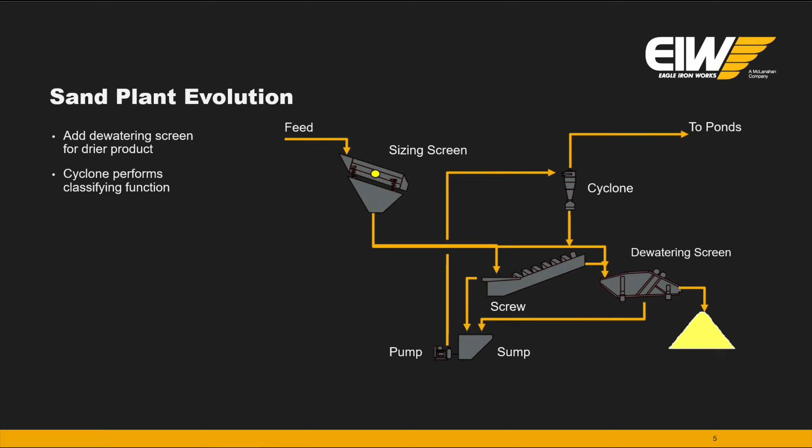Getting onto a conveyor belt, there was still some loose water on there. That could cause housekeeping issues. By adding a dewatering screen, it removed all of the freestanding water and produced a drip-free product. Conveyor belts were able to handle that better. The stockpiles would be drier at that point. Material was essentially ready to go, shipped out that day if need be. We had a faster turnaround for the overall product.

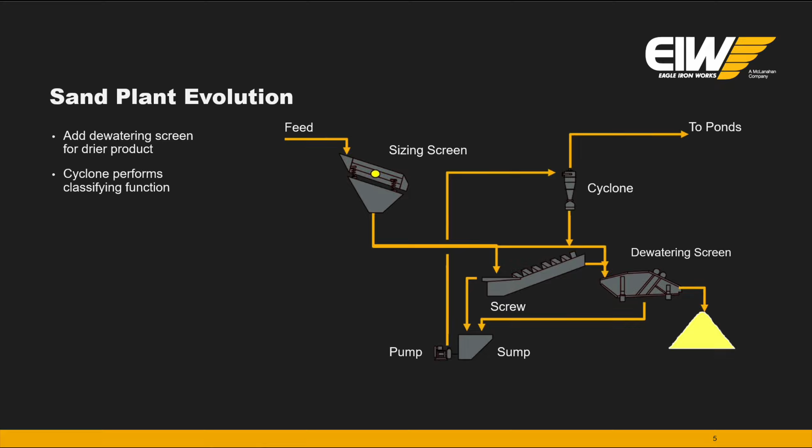So when demands for the sand became higher and higher, needing a drier and drier stockpile, that's why the dewatering screens were introduced. And at the same time, the cyclones were still doing the majority of the final classification. So at that point, there was a question whether the screw should be in the process, and it was removed. And the change in that entire process, when you remove the screw, that was doing a bulk load relief for the cyclone. So the pump, the sump, and the cyclone had to get bigger because there wasn't that load relief from the screw. Everything else was still staying the same.

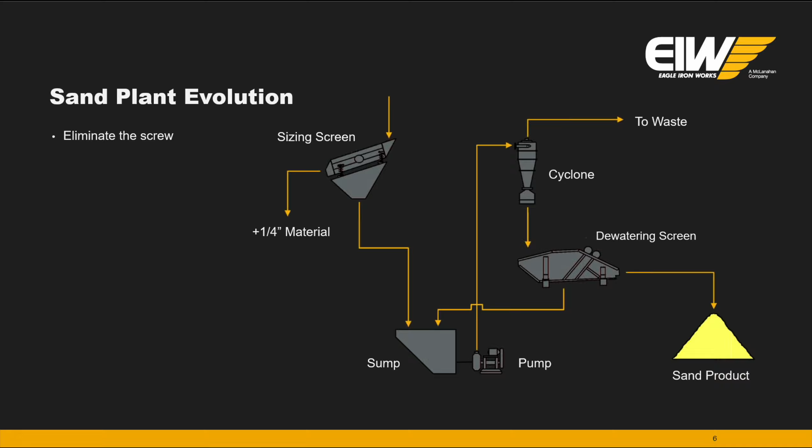The cyclone overflow was still the waste. So the cyclone was doing all of the process. The dewatering screen's doing all of the dewatering. The sizing screen up front really hadn't changed too much. So that's where we moved into the modern sand plant. That's when we say modern sand plants for the washing, classifying and dewatering of sand, drip-free consistency.

And when I say drip-free consistency, just imagine taking a handful of sand, making a ball, kind of like a snowball, and pressing it together and trying to squeeze the water out. No water would come out. That's the drip-free aspect of it. So these kind of plants are modular in design. They're easy to set up, small footprint, and there's a level of configurability to them for the different applications that you want to do. So a little more flexibility. It does take a little bit of planning.

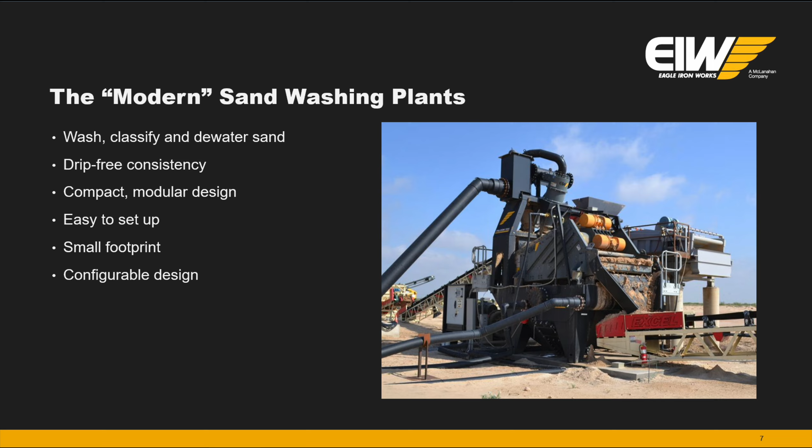Just to take a look at it, the next slide that we're going to be looking at is one of the case studies that we've done. Okay, so this is a project that we did in Kermit, Texas with our dealer Excel Machinery. Their goal with this project was making 140 mesh frac sand. So they needed something that was easy to set up; they had a small window to make this thing produce material. So we wanted to find some equipment that could produce it efficiently and cost effectively at a good price point. And their whole goal was really just to get those ultrafines out of there so they could have a sellable product.

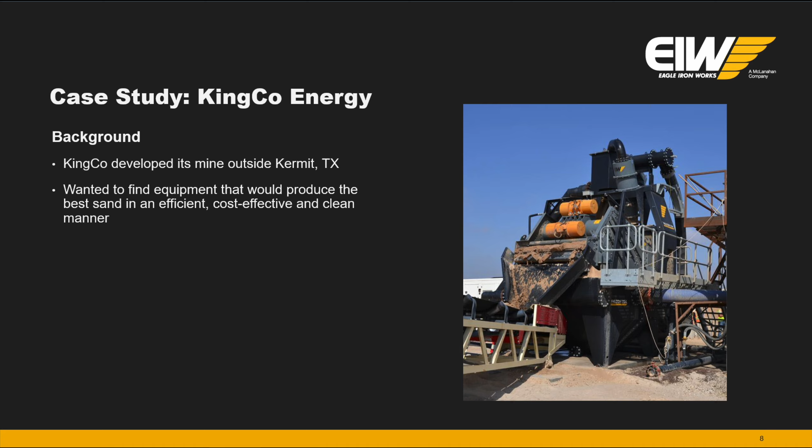So our dealer Excel came up with a Falcon 724 for this application. It would be good for the tonnage they were looking to do. We rate these plants anywhere between 300 and 350 tons an hour. In this application, they were more around 250 tons per hour in real-world production, making sure that they could make the classification and the cleanliness of the material needed in order to sell it. They really liked this one because of its ease of setup. They were able to put this plant up in about 2 days.

It is a modular type design. So we have a sump, a dewatering screen that sets on top of that, and a cyclone bank that goes on top of those two items. So very modular, very easy to put together. It comes with its own power panel, and everything on the plant is mirrored. So if you need to have your feed come into the left or right side of the sump, or if you need to move your catwalks to either side, that is all available as well. And they had this thing actually producing material in under 2 weeks.

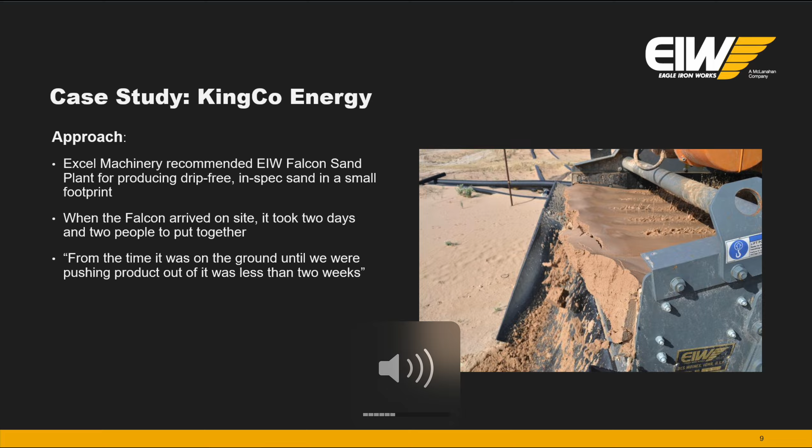Again, like Alan said, a big key here was the moisture content. So they were able to get to about 7 to 8% moisture off of that dewatering screen. And the footprint was much smaller than what they were used to, so that did help. At the end of the day, they were very happy. They had a nice dry product that was in spec, and they were able to load it out and sell it within the same day as it coming off of this plant.

So that plant was put out there in April of 2024. It's been running almost continuously since, and a very good case study for Eagle and our dealer Excel.

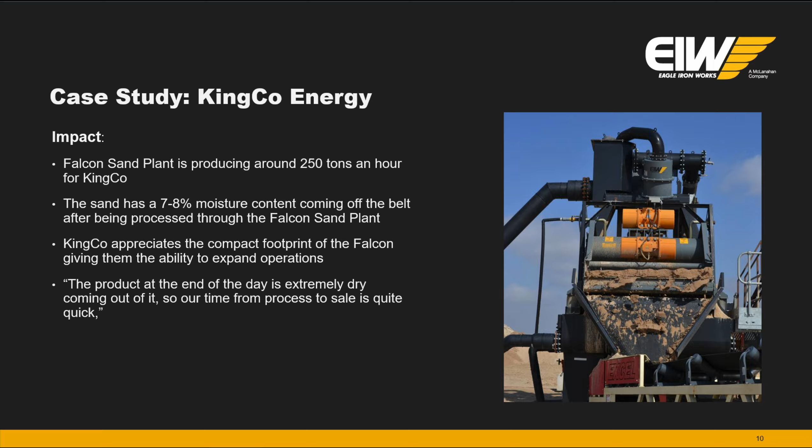So just to give a little more of a breakdown of what a plant looks like, Kurt gave an excellent verbal reference of it, but here's a picture of it. You have the catwalk. We talked about that as being configurable. That's the reversible. The access is very important to these type of plants because they're a little bit more elevated, a little bit harder to look at from the ground level. So you need to get up on that level, looking at the screen itself, looking at the underflow of the cyclone. That's what the walkway presents access to.

The control panel, then we have the slurry pump, which is, just think of it as a conveyor for slurry, and that's taking it up to the cyclones. Cyclones are doing its classification. The overflow is taken away, and the dewatering screen has that discharge of material.

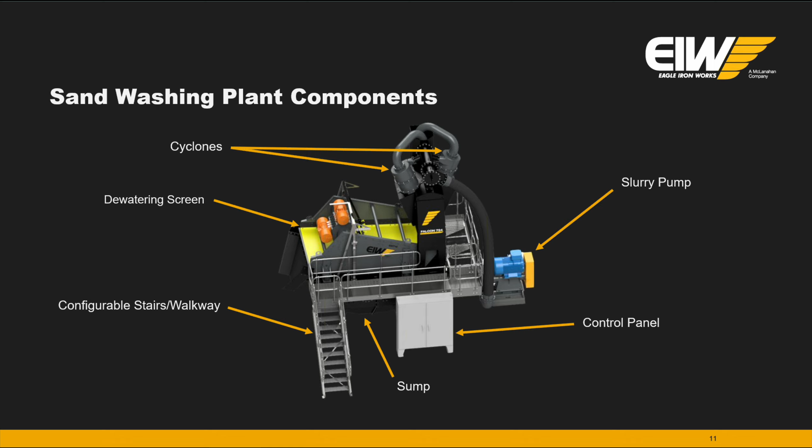So how a sand plant works, we've kind of talked about this a little bit. Most of these sand plants like this are sump receiving the slurry in the first place. The pump takes it up to the cyclones. Sand is classified there. The dewatering, like I said, is a drip-free, ready for conveying. Video here shows how it's discharging. So you see how that material just kind of crumbles off the end of that dewatering screen.

10% is a very normal range. There are a lot of applications where we have gotten down to the 7%. You're not going to really see much further beyond that off of the dewatering screen. Some material holds its water a little bit more, even though it's still drip-free. It can go all the way up to 20%, but it all depends on the material itself.

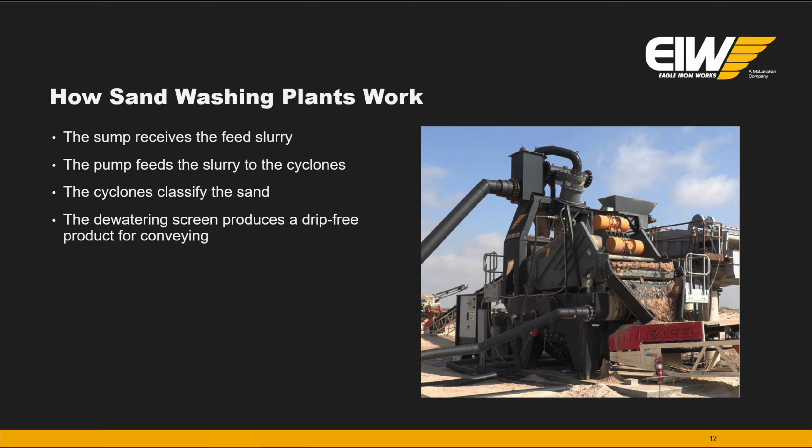So sizing up a sand plant, like a lot of plants, you're just looking at the tons per hour, your gallons per minute, the feed gradation. And we have it in here, multiple products and gradations. And that's because some of these plants are not just that straightforward. They utilize the dewatering screen for two products at the same time. So you'd have parallel sump, pump, cyclones, and then have both of those systems discharge on the same dewatering screen. It's a very common aspect of some of the more advanced ones. So you can have a coarser sand and then a finer sand and a blending capability on the discharge.

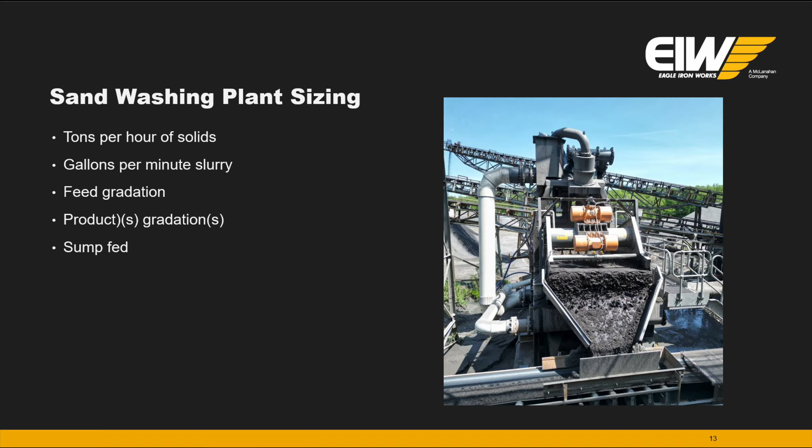So that's really on the sump fed type of approach. And like I said, most of those are sump fed. More custom designs can be screen fed, just changes a little bit. Still same equipment on there, but that's the approach of most sand plants.

So with the cyclone doing the majority of the heavy lifting of all the separation in here, I wanted to touch upon a little bit of the cyclone history. We talk about it as a modern piece of equipment, but in truth, it's quite old. It was first patented back in 1885. They started really fine-tuning it for liquid solid separation in 1891. For about 50 years, it just really wasn't understood. And in truth, in some industries, it's still not really accepted or understood by most people. Though at this time, if you dig down into the technical aspects of it, it's pretty well understood.

It's very predictable. But it was in 1939, a group called the Dutch State Mines took a chance and started utilizing hydrocyclone technology, mainly for coal and sand separation. The model that they made out of it really changed and set the standard for the rest of the industry. World War II ended, and we really needed, as a world, not just as a country, a boom in that type of material.

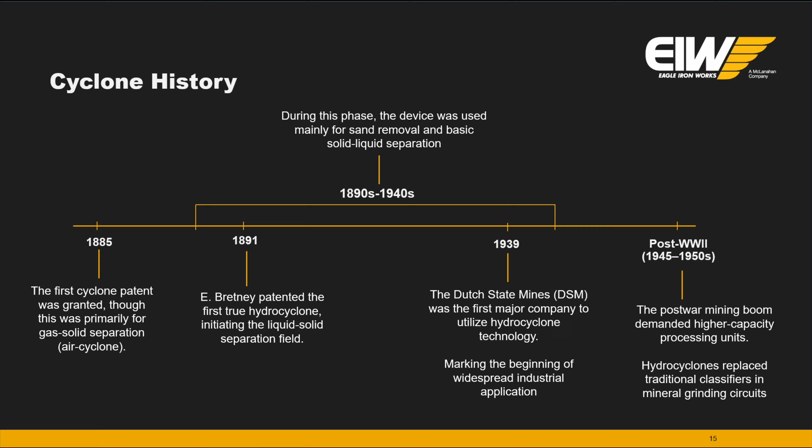So the cyclones themselves became more prominent because they provided an advantage over other pieces of equipment, the higher capacity aspects of it. In some industries, the cyclones have completely replaced the older technologies. And for the sand and aggregate type of approach, a lot of the classic equipment is still good, but the hydrocyclones have opened up the door for other areas.

So cyclone application, classifying between 38 microns, which is about 400 mesh, and 150 microns, which is about 80 mesh. Desliming the material, removing clays and ultrafines is a real good role for a cyclone. Those materials stay with the water. The water is removed into the overflow.

But at fines recovery, this is an area that the cyclones really have excelled at in a lot of comparisons to other pieces of equipment. And as for thickening for downstream equipment, it really is good for water scalping in a very tight area. So it has a lot of flexibility, a lot of uses within our industry.

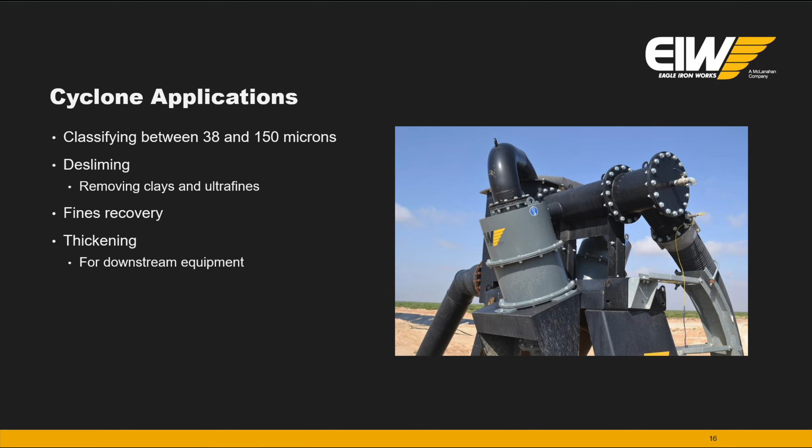So the advantage of the cyclone itself is it tends to be pretty inexpensive in comparison. Processes high volume, minimal floor space, head space, no moving parts within the cyclone. It really counts on the pump to do the majority of the heavy lifting to get this to actually perform.

It does have a better separation efficiency over free settling classifiers, and the capacity is independent of the amount of fines present in the feed itself, which is different from what fine material washers have. You will get them derated if you have an excessive amount of -50 mesh. So that's where the cyclone doesn't really have an impact on the gradation that's going into the unit. It still performs at the same rate. It doesn't get derated.

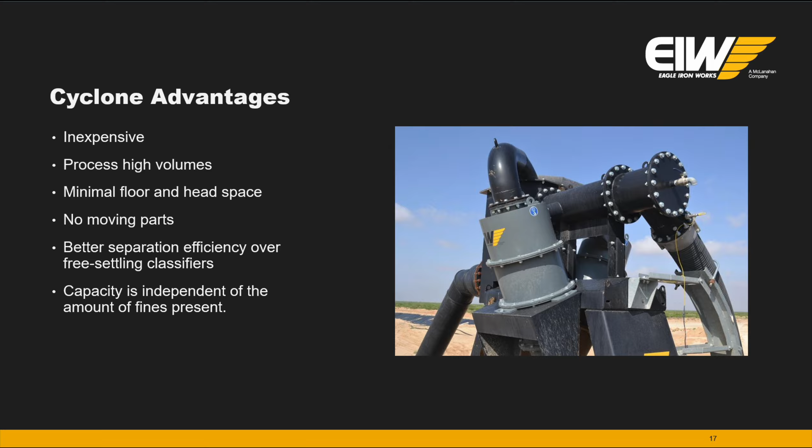Making up the cyclone itself, pretty simple. It's a feed box, feed inlet itself, a vortex finder that's for the overflow, an optional feed box extension, which is part of the configurability of the cyclone itself. The extension itself will cause the cyclone to capture finer material.

The cone sections, it's just shown as one here, but it can have multiple sections. This is another part of the process to get the cyclone itself to perform properly. And the spigot, some refer to it as the apex. This is the discharge, the underflow.

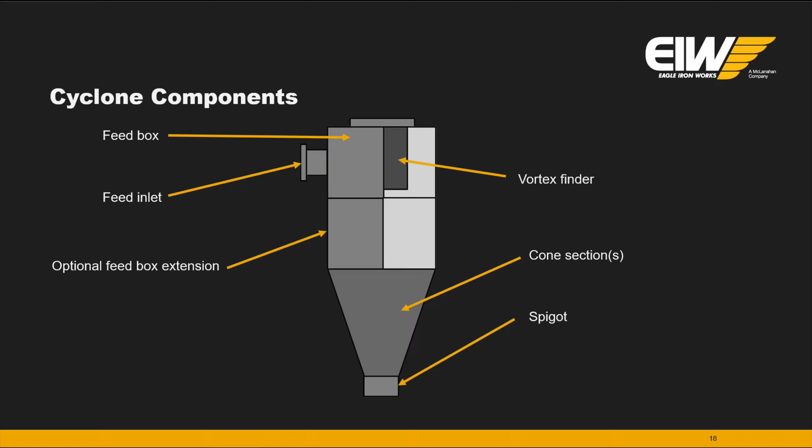So how a cyclone actually works, since we can't see inside of it, we have to do a lot of research and modeling, and that's where it's stuck for quite a while, why it didn't get done, because people just couldn't see inside of it. They really needed confidence in how this works. So over time, that's what's really happened.

So the centrifugal shaped device has one entrance and two exits. Essentially, it's a highly engineered pipe T. And in that, it has to have certain performance requirements in order for it to start doing that separation. So it's fed under centrifugal force, which causes the material to accelerate around the outside of the unit itself. That acceleration causes material to start its separation.

And also the swirling motion, kind of like a tornado, creates a vacuum in the middle, and that starts pulling air up through it. So you have two opposing flows within there. You have the slurry itself circling around, and then you have an air core being pulled up into the unit. What's happening in here is the coarse and heavy material is doing a motion downward, while the lighter, finer material is doing its motion upward.

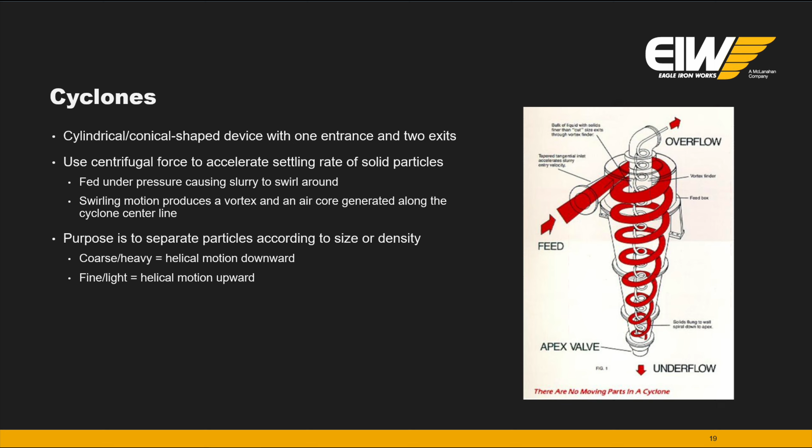Taking a little bit different look at that, same type of idea behind it, just explaining a little bit differently. The rotational spin causes the particles to spin on the outside. The heavier the particles, the more they get pushed to the outside. You recover the particles as they discharge out of the underflow.

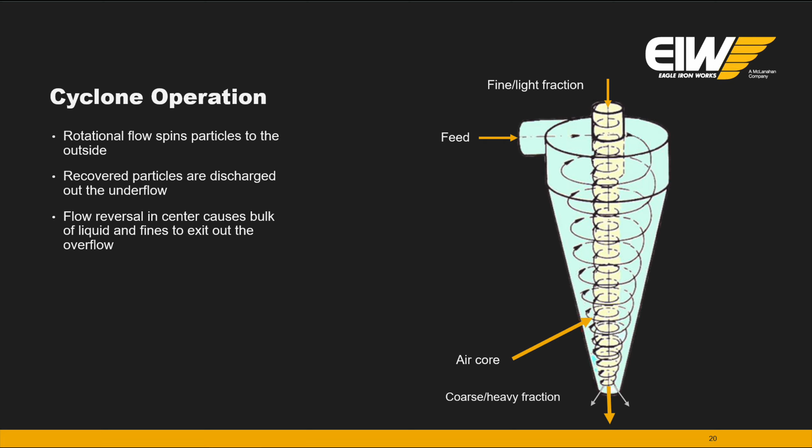The reverse of that causes a bulk of the liquid and some of the fines to go with the air core that's pulled up through the vortex finder. That's where the light fraction happens. So there's that swirling motion of both of them, the air core and the slurry itself.

And really, to get more into the physics side of it, what's happening in there is you have two different opposing forces pulling on a particle in different directions. The centrifugal forces caused by the pressure of going into this unit pull the material to the outside. The larger the particle, the heavier the particle, the more the centrifugal force has an impact on it.

So for that particle, if the centrifugal forces are greater than the drag forces, it's going to go into the underflow because it's going to be pinned to the outside. If the centrifugal forces are less than the drag forces, meaning the particle is smaller, lighter, and goes with the water, it has a higher probability of going into the overflow.

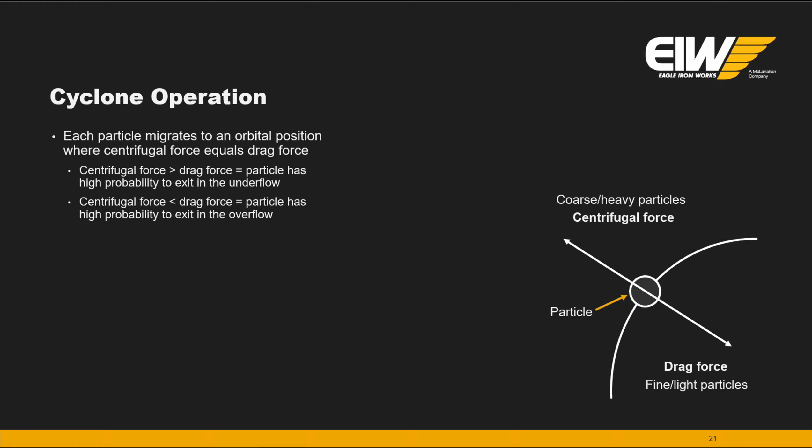So cyclone performance is really measured by measuring the pressure, because the pressure is a great way of telling us how much centrifugal force indirectly is being caused within the unit. So the higher the pressure, the higher the centrifugal force. The lower the pressure, the lower centrifugal force. So with a lower pressure, the centrifugal force has less of an impact on the particles, and the drag force will pull it more into the middle. Higher pressure, higher centrifugal forces, more pushing to the outside.

So when you're operating a cyclone, you want to look at what you're really trying to do. If you're trying to make a cut, if you remember, I said it goes from 38 microns to 150 microns. So if you're trying to make that cut at 38 microns, you're going to want a very high pressure, so 20 to 25 psi. If you're going to be wanting to make a coarser cut, that's where you're going to be going with the lower pressure down in the 8 and the 10 psi. So when you're doing your sand washing, you're generally doing that at the lower pressure. When you're doing your fines recovery, you're doing it at the higher pressure.

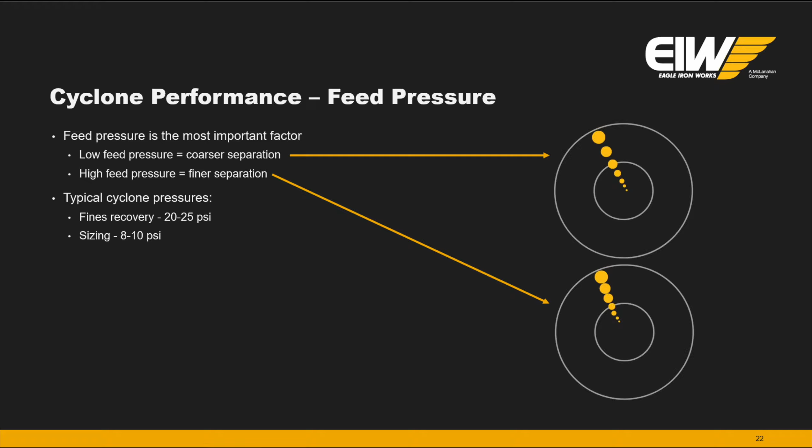Now, the vortex finder does play an impact on the cut size. So if you have the same flow going into the unit and you change your vortex finder and you go to a larger vortex finder, you're going to make a coarser cut. And if you think of it as just an opening for the material to go through, you've opened that up, allowing more material to be captured by the vortex finder. It also reduces the back pressure on the entire unit. So you'll see the inlet pressure go down. The smaller vortex finder with the same flow rate, you're going to get the finer separation because there's less room for that material to go out. So the vortex finder and the inlet pressure itself go hand in hand to help make the size cut that you're looking for.

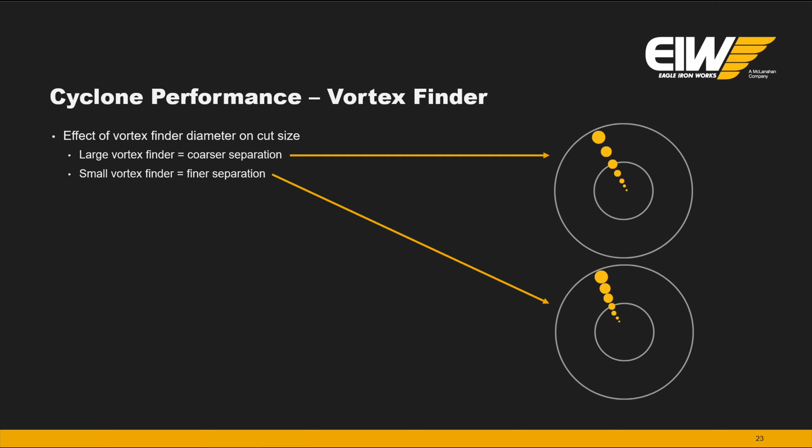On the underflow, this is really more driven by the percent solids in the entire slurry. So it's going to come out looking kind of like an umbrella. What you're seeing here is as the slurry comes out, it'll fan out. And you can see this flexing a little bit here and there. And that's a change in the tons per hour that's going through these units. The inside of that is hollow. That's where the air core is being pulled up in.

So as you have more material, that umbrella tightens up inward, the spread of it becomes less and less. As you have more water, it spreads out, fanning out more, and you'll see less of a curtain and more of water spray coming out of it. And as you increase the amount of water coming out of the bottom of the cyclone, that's where the fines will also come with. So in a way, it does have an effect on your cut size, but only for the amount of fine material that gets pulled into the underflow, which would normally end up in the overflow. In a very properly running cyclone, the best situation is to have as tight of an underflow cone as possible, and that's where you're going to get your highest efficiency.

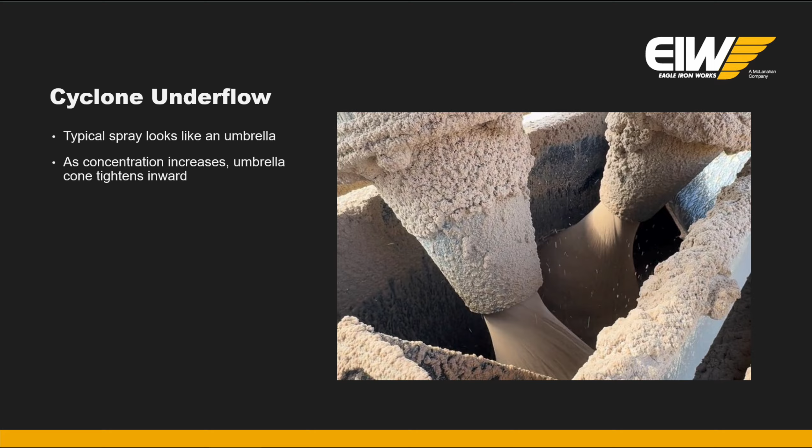Now, on the opposite side of that, if you get up into a position where you have too much solids, that's where you get into what's called roping. And it's called roping for a simple reason. It resembles an old rope as it's coming out, being swung at the bottom of the cyclone. So what's happening here is the feed density is too high for this configuration of the cyclone. So you have to reduce the feed density by decreasing the solids at the sump. And that may not necessarily be what you want to do, because you want to produce X amount of tons, and a decrease in the throughput into the plant is detrimental.

So fortunately, there's another path to go, and that means the spigot's too small, and you can replace it with a larger spigot or apex, depending on which terminology you prefer. They do have slightly different meanings, but they get interchanged quite a bit. So opening that up allows that air core to form up in there and begins that separation again. Without that type of air core, you really only have a pipe tee. That material just goes where it wants to go, and there is really no controlled separation efficiency at this point.

And also, I want to chime in on that portion. So with all of these plants, before they're sold, we have our applications and engineering group look at it to make sure that it's going to work for your application. We prefer that you send us your material gradations, the cut that you're looking to make. There are some adjustments that we can make as far as apex, vortex finder.

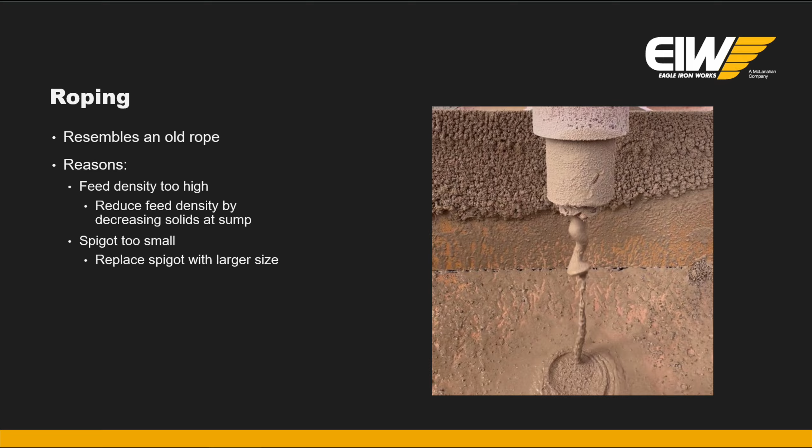At the same time, you have better control over the water itself. So there is a balancing act to that. Correct, and a better cut. Yeah. So as we'll get into, this is why you would pick a cyclone over a fine material washer. And this segues perfectly into this idea. The cyclone is closed to atmosphere, not necessarily an advantage, but it is closed to atmosphere. You don't get to see what's happening in there. You get to see the results.

We say it's very fast running, which just means it has a higher capacity. It just handles more material in a smaller area. It can increase the overall capacity of your plant. It's great at capturing fine particles. Because of the fluctuation around the apex itself, it does not like irregular feed. With the pressure being the driver of the centrifugal force, changing the flow within the cyclone changes its cut point and changes its performance.

So it does not like being irregularly fed with solids or fluids. It likes a solid, stable, consistent type of process. And once it has that, it will deliver a very solid, predictable performance. So they go hand in hand. They don't like being overfed. That kind of goes to the apex itself. It backs up and causes a separation issue. It does not handle being overfed very well.

Oversized particles also have an impact on it, meaning that if you get too large of particles in there, it can damage your liners. The material discharging from the cyclone itself is not conveyorable. It's too wet. It's down in the 60-70% solids. You try putting that on a conveyor belt, and you're just going to have a mess. So that's one disadvantage of it, pure and simple. Sometimes it's not truly a disadvantage if you're using this further on in the process and you don't want to dewater it that much.

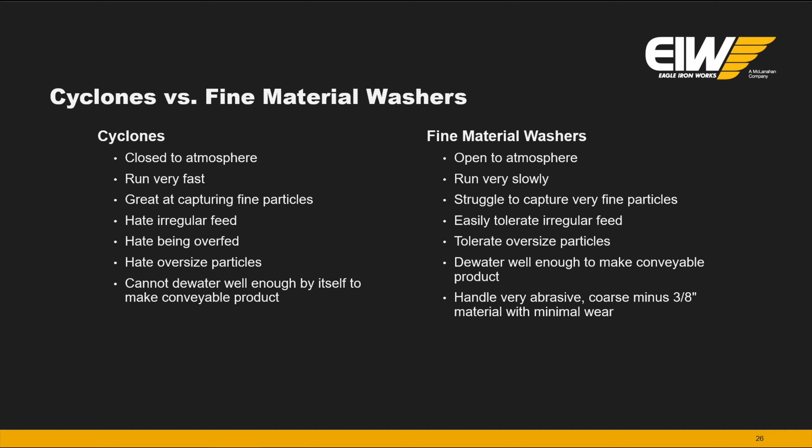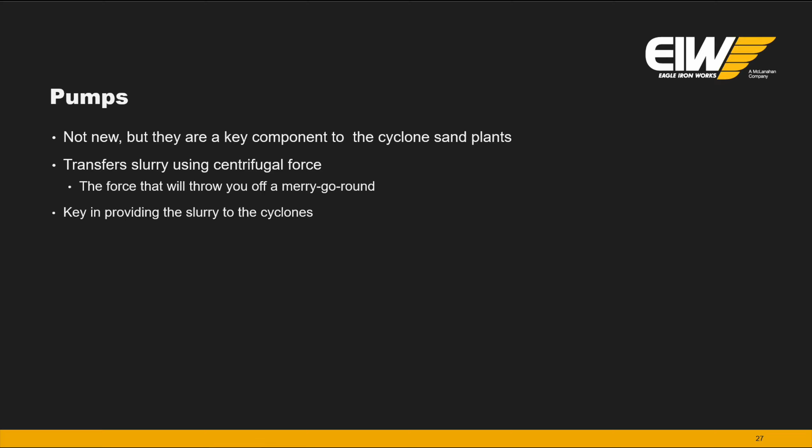So looking at a pump component itself, they're very simple, but once again, they're kind of closed, so you don't get to see inside of them what's going on. So you have your suction inlet, your vanes, which are part of your impeller, the liners themselves, the casings, and the discharge port. All of those are required in order for this to work.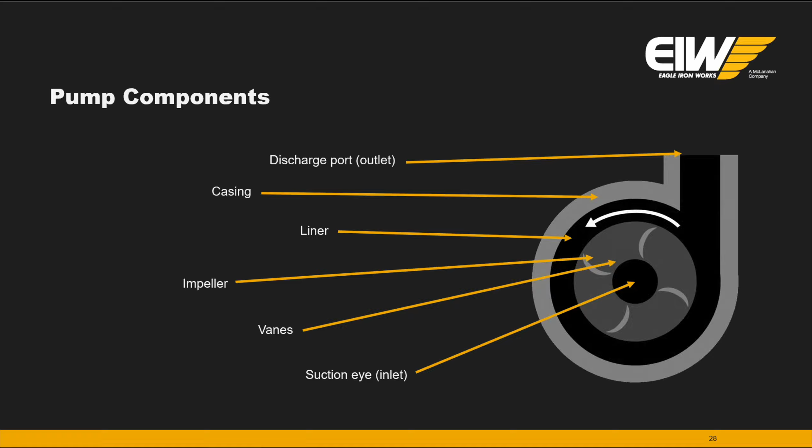So material flows into the suction eye. Calling it a suction eye is a little bit of a misnomer. It does not actually pull the material into the pump. It requires the sump and atmosphere to push slurry into the pump.

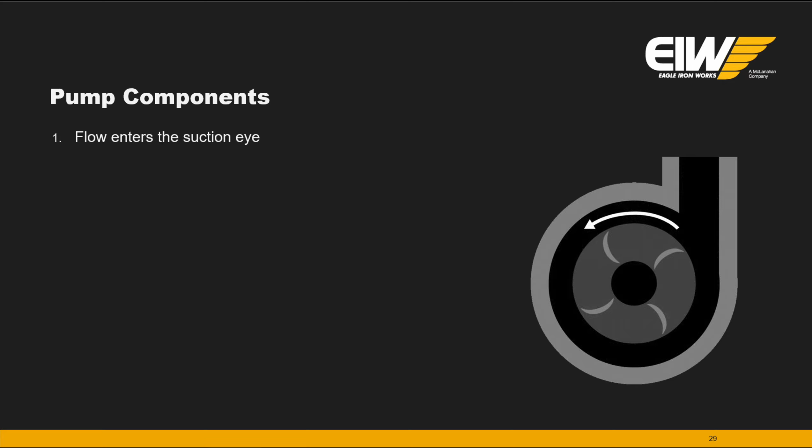Once that happens, the impeller will impart energy onto the slurry, and as it's spinning around, it's throwing the material outward, causing a pressure to build up inside of the casing. So using that centrifugal force to push that out, the material doesn't have anywhere to go against the casing itself, so it increases its pressure, and then it causes it to move out the discharge port at a pressure.

So as you put more energy into the pump, the further and further you can pump it against higher heads. So as we were talking about for the cyclones, as you move it from site to site, if you change the process and you change the flow, you also have to change the pump. And as you change the pump, that's going to affect the cyclone. So all these are interlocked.

So if you have an application where you're doing, let's say, 2,000 gallons, and now you want to do 2,500 gallons, you're going to have to change your pump. And then you're also probably going to have to adjust your cyclone to handle the higher flow rate. And they are configurable in that regard.

So anytime that you're moving any of these plants around or changing the process, it's a real good idea to pull in the original manufacturer and talk to them about it so they can help you set this situation up the best that you can, so you get the results that you want.

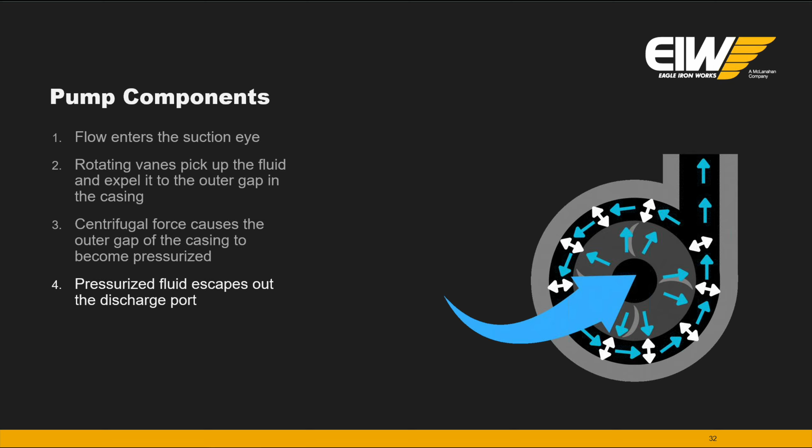Moving on to the dewatering screens, they're really the tail end of it. Once again, they're not normally doing any type of separation on there. They're producing a stackable, conveyable, usually ready-to-sell, drip-free sand product as it discharges off there. Short turnaround from a stockpile into a truck, as was mentioned earlier, as early as the very same day, but usually next day is what I see in the field when I've been out there.

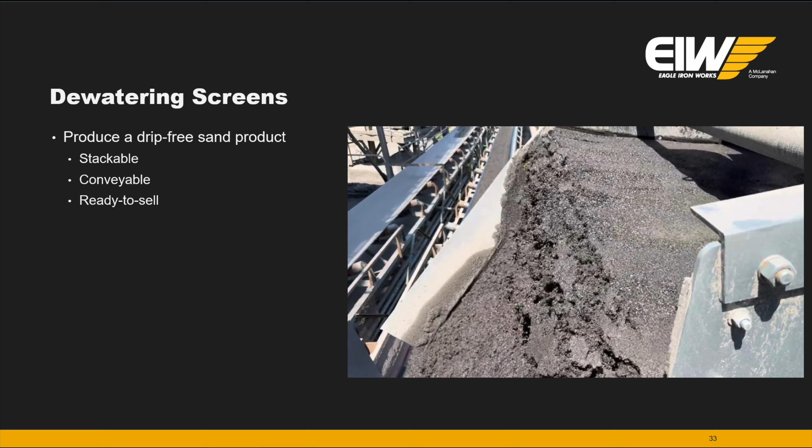So taking a look at the dewatering history, the dewatering screen is by far the newest piece of equipment in this entire process. It originated in South Africa, used for gold mining. They wanted to dry up material with a screen instead of sizing. It expanded a short time later into the coal industry. It was brought into North America around 1987, and it really started being pushed not just in the US, but around the world in the early 1990s. It gets you to a point where you're drying the material to a level that it's very easy to handle.

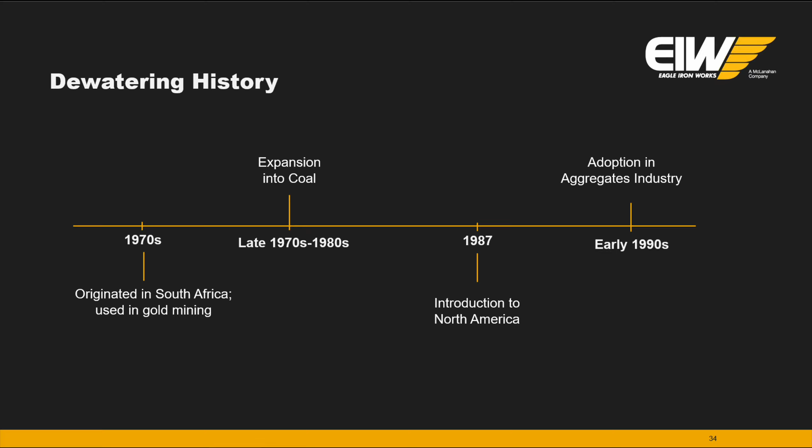So while screens have been around for a very long time, dewatering screens have been around in the 50-year time frame, and they're designed to do the exact opposite of what traditional screens do. It's not to make a separation like a traditional screen would, allowing the material to pass through. It's just the opposite. It wants to retain as much material on the screen media as possible and only allow the water to pass through. Now, that being said, there are some fines that pass through. And that can actually be used to your advantage at times, and I'll talk a little bit about that as we're moving forward.

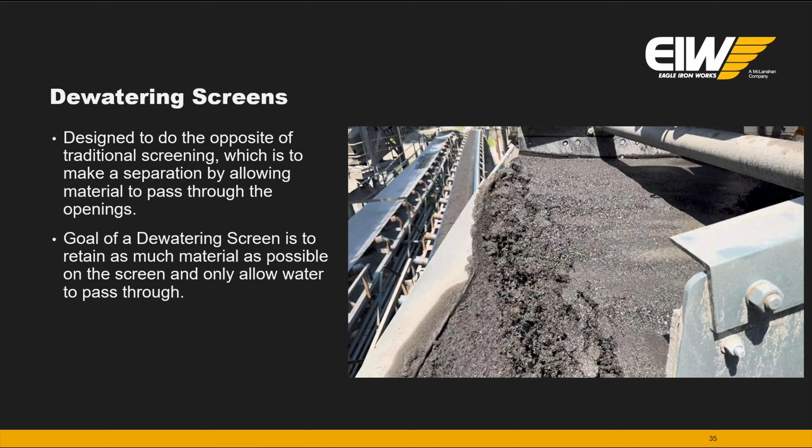So how a dewatering screen works. You heard us say drip-free sand, stackable, conveyable, ready to sell. Material normally comes onto a dewatering screen in the 50 to 60% solids range: underflow from a cyclone, underflow from a screen, underflow from a sand classifying tank. A lot of equipment out there will make about a 50 to 60% solids slurry, so it fits well within what a dewatering screen can do. If you go below 50%, you have to oversize the dewatering screen just to handle the drainage area. These are designed to handle that specific or higher percent solids for drainage.

So the pool of water will form in the back, and since the screen is on an incline, the linear motion of the motors will throw the sand forward, but the water will always flow backwards. So it stays back in this pool area, and the back plane allows a lot of the drainage out in the first part of the dewatering screen. As it moves up, it gets drier and drier, and the material discharges drip-free at the end. Because of the incline, the water doesn't go up there.

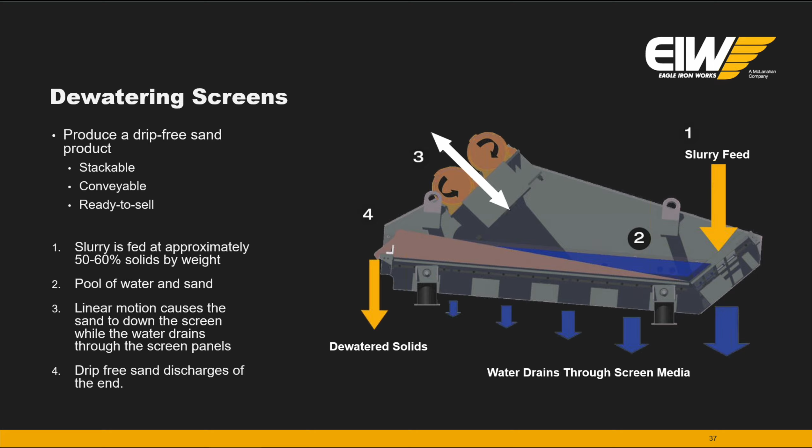The vibrating motors of the dewatering screen are doing all the action. They're linear motion, set at a 45-degree angle. Optional spray bars: why would you put spray bars on a dewatering screen? Why would I add water to a dewatering screen? Well, in this application of a sand plant, by adding spray bars you can actually do a secondary wash of your material.

Your cyclone gets rid of the majority of your fine particles, but you're just a little bit out of spec. You have a little bit too much fines, and you do that last bit of cleanup. And by spraying water on there, you're increasing the amount of material that passes through the screen media. Now, you're not losing that material per se, especially if it's good material, because it's going down into a sump, and then that's going back through the cyclone.

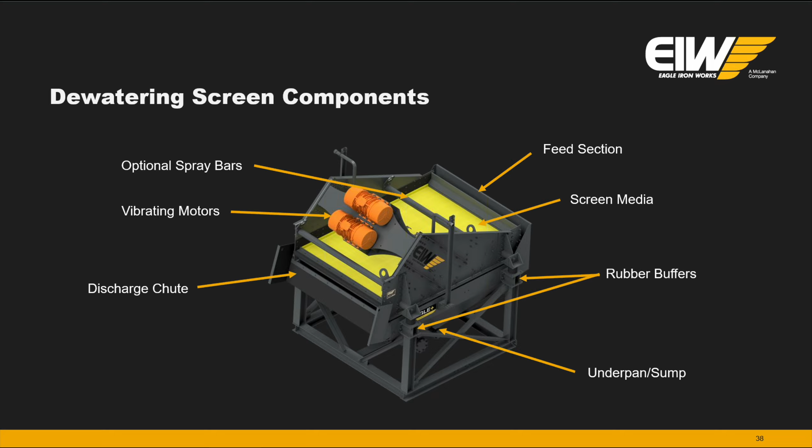So dewatering screen operation, just a picture of what's going on there. As you can see, the first picture there's a ton of water on this. It's just coming in there. This is probably in the 50% solid range coming into this plant. Plus the spray bars in there to clean it up a little bit. So they're having a little bit of fine material as it's going through the plant. The cyclone didn't quite get it enough. And it's no fault from the cyclone. It has to do with the feed coming in. It's just a higher amount of fines in there.

So this is an approach of attacking the fines in an additional way. It's getting that secondary wash in there that really provides the fine tuning of your product. And then the discharge right here, as you can see, it's coming off there. It's clumping off. That's in the range of, I would say 10, maybe 12% moisture coming off there. As you can see, there's water right towards the very end of it. That kind of indicates that the screen is close to its capacity. If you were to add a lot more tonnage to this, you might get some wet material coming off of it.

You might need to do a little bit of modifications on the screen media. Towards the discharge end, you can do some opening it up and allow the water to discharge or to pass through a little bit easier while still maintaining all of that material on there. So there are some aspects that you can do right here.

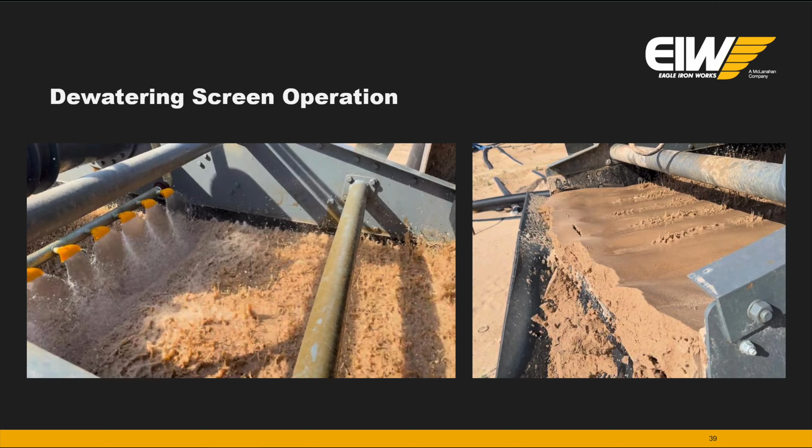So the advantages of dewatering screen: it tends to be more flexible with multiple products per machine, allows that blending. That's what I was talking about. You can have the coarse sand on one side and the fine sand on the other, and then you can meter in the fine sand to make the product spec that you need. It definitely makes a drier product overall. It cleans up, gets you a higher SE than other processes.

That's one of its advantages that you don't normally think about, but it does make a cleaner product in the end. And in some cases, you end up using less water, reducing overall water loss because you're keeping that water within the system itself instead of sending it off to a pond through evaporation or other aspects where you can lose that water. So it can improve your overall water balance.

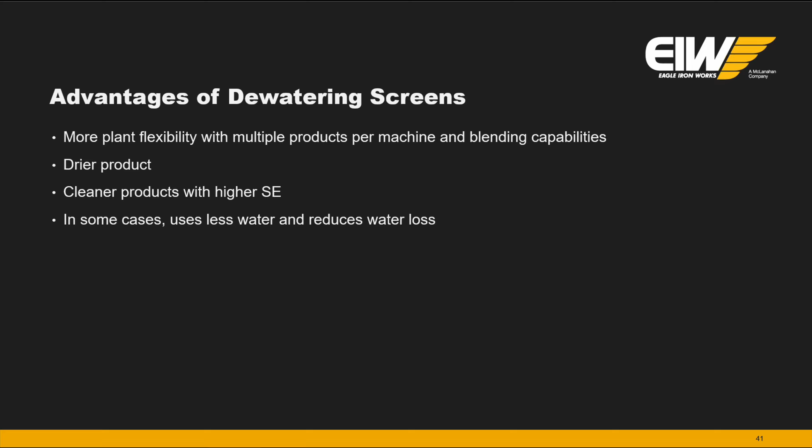Because of all of that, and you take a look at the entire wash plant itself, the cyclone dewatering screen plants generally do have a higher average yield in the range of 3 to 5%, and that depends upon your material itself, than just a screw. So if you start running the numbers on this, you have an increased product yield of just say 5 tons per hour, $5 a ton, that's 50,000 per year on an average for 2,000 hours per year.

Just where those numbers come from: a screw overflow generally has 70 to 75% minus 200 mesh in it, which means you're losing good material. On a cyclone overflow, you only have 85 to 90% minus 200 mesh. So you're only losing 15 to 10% of your good material versus 30 to 25% of your good material. So there's where your increased yield happens.

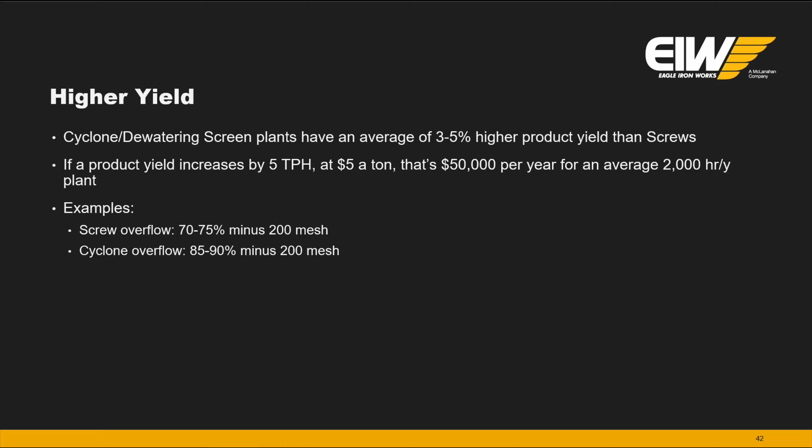So moving away from just the wash plant, still using the exact same technology, just a little bit different approach to it, you expand the entire process to capture some fines, the ultra fines, the stuff that could be considered waste streams going out to a pond. And this is capturing material down to 400 mesh. And once again, like I said, it's still using the same technology, just slightly different approach to it.

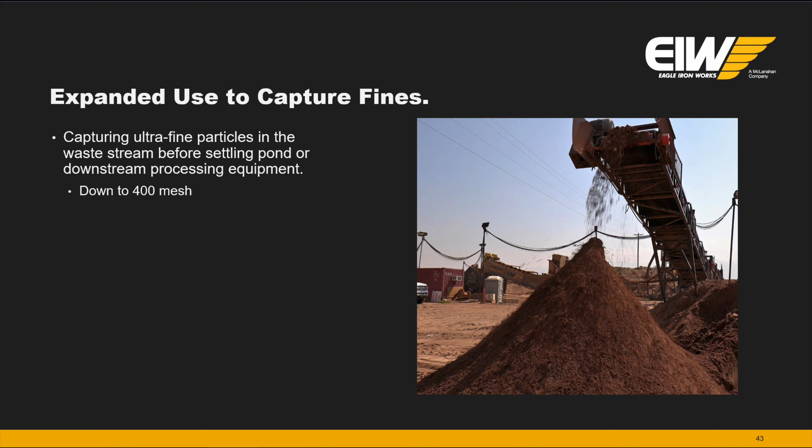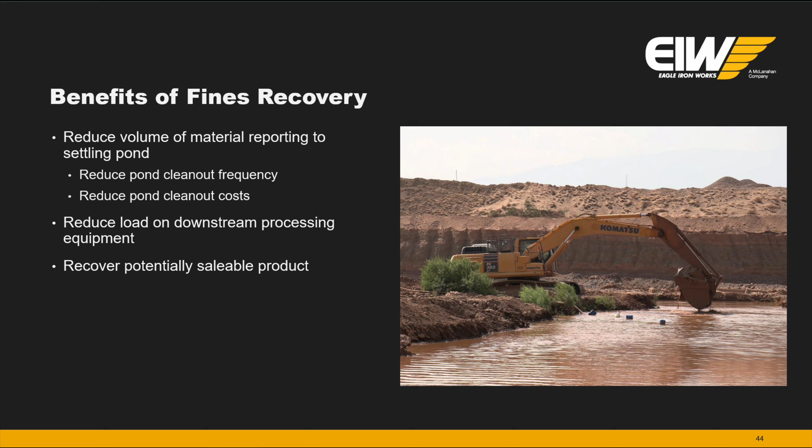So instead of digging out a pond, if you're in that situation, you reduce the amount of material that could go to a settling pond, decreases the clean out frequency, decreases the cost in general, reduces the load on downstream processing equipment by getting that material out here. And you may actually have a potential sellable product in multiple places. Once they had it on the ground into a stockpile, a home is found for that material. And it went from a waste and a cost to now a revenue stream, or at least a break-even stream.

So when we do cyclones for the fine recovery, there's a slightly different approach. You may have picked up on it already. We're going to be running them at a higher pressure. So we're operating in that 20 to 25 PSI. When we're classifying, we're now focusing down on that 38 microns range. It's still thickening up the material for downstream, removing it from the process itself.

When you take a look at a wash plant, you may see 1 or 2 larger cyclones on there. When you take a look at a fines recovery plant, you're going to be looking at multiple smaller cyclones. And just a word of warning, you don't want to go too small of cyclones. The material in there is still larger than what some small cyclones can handle. You go down into the 4-inch and 6-inch cyclones, and they end up being plugged up because the top size just can't go through the bottom of the cyclone itself.

So make sure you don't go too small of a cyclone. You're really not theoretically getting much more material by going with that small of a cyclone, and you're having an overall operation ease by using the appropriate size cyclone for that type of process. And that, once again, kind of goes into, hey, talk to your people, let's take samples, let's take a look at it, run it through an applications thing, and we can make that real good suggestion for you.

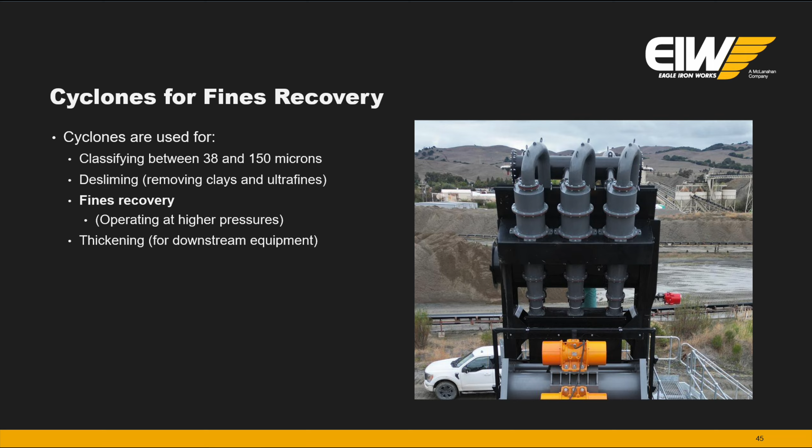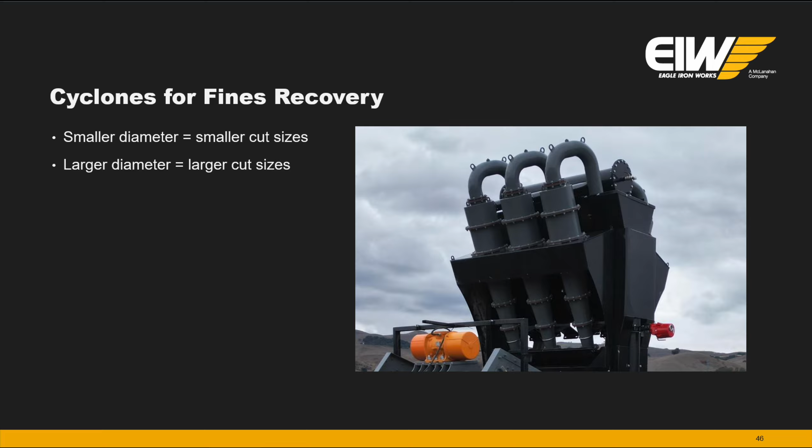So as I was saying, smaller diameter cyclones make a smaller cut. It's just the physics of it. The centrifugal forces, as you're getting smaller, have a higher impact on the material itself. More material will end up in your underflow. So larger diameter cyclones make a coarser or larger cut size. That's why sand plants use large cyclones. Fines recovery uses small cyclones.

And just like the other ones, even though all of this material may pass through the screen opening, the media opening, theoretically it would pass through there. Because of the way the process is set up, the way the dewatering screens happen, the material just doesn't pass through. You start building up a bed on there, the material cakes up, blinds up the media, and that material comes across the discharge of the dewatering screen, just like on the normal wash plant.

It's still drip free. Now it does have a higher amount of moisture in it because smaller particles retain more moisture. So these types of units, you're going to be discharging in the range of 15 to 20% moisture. But if you reach out and grab a handful of that and try to squeeze water out, it's just not going to happen. It's just because of the nature of the size of the material, it retains a little bit more water, even though it's considered drip free.

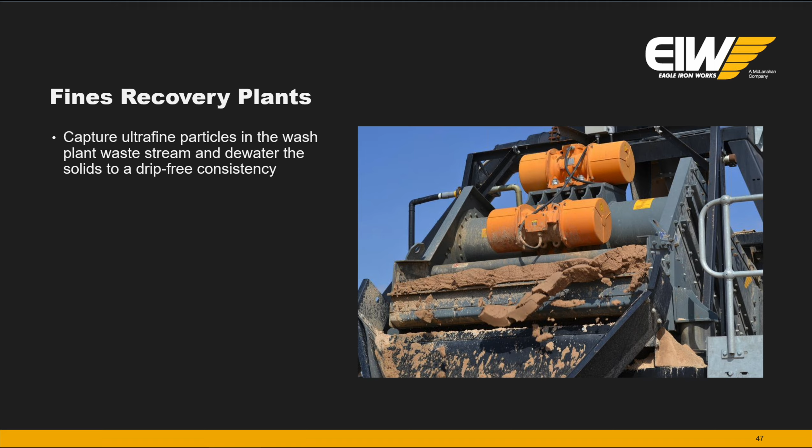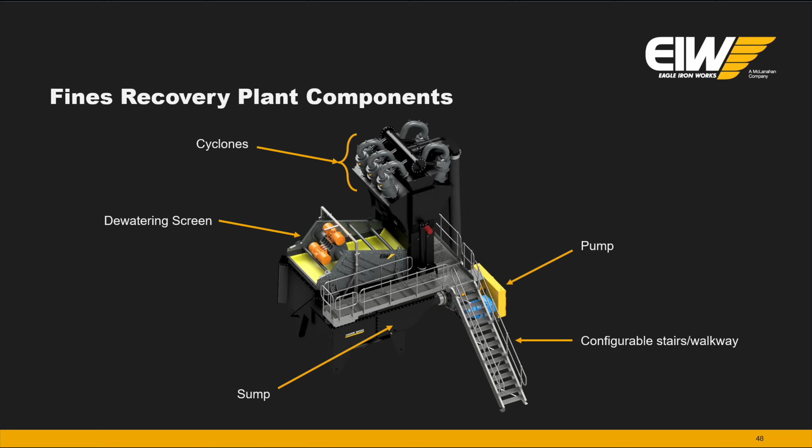The components of the plant are pretty much the same thing. The cyclone, the dewatering screen, the sump, the pump, you're still going to want to have that access on there. The major difference for a fines recovery plant is as the slurry is going into the sump, a lot of the cyclone overflow is fed back into the sump itself.

And this is helping to maintain a steady, stable process. So the slurry pump is going at the same rate the entire time. Cyclones are operating at the same pressure all the time. The underflow from the dewatering screen is not being lost. It's going back into the process, going back up to the cyclone.

So even at the very beginning of a fines recovery plant, as you're starting it up, it may seem like it's not capturing anything. It takes a while for that material to build up until it builds a cake on the dewatering screen. And then you have that discharge of material, which ends up being drip free. So like I said, that material may be 100% passing the media opening, but eventually it will catch a bed on there and you'll start pulling out that material, and it'll consistently pull it out as long as it's coming in.

And since the material may pass through the dewatering screen, it's just trapped in the loop. Your cyclone, just like the other wash plant, is making that classification. If it's going to end up on that screen, the majority of the time it's going to end up on that screen again. So it's that closed loop process.

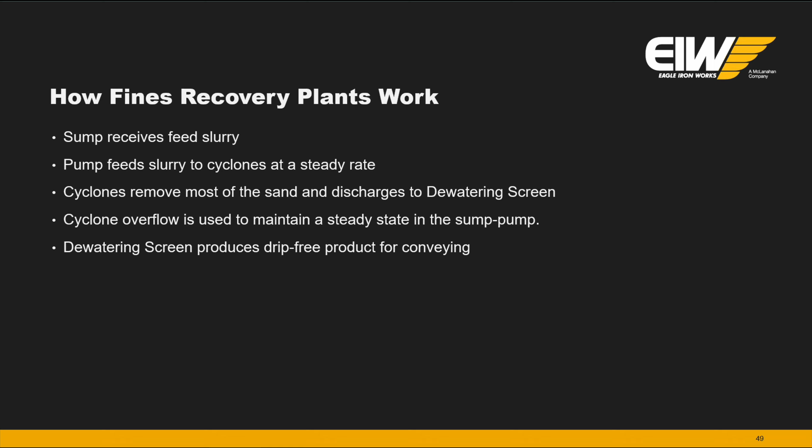Those are just names for a hindered settling classifier. Not really going to get into that. That's really not used a lot in sand and aggregate. An FBC is used in lignite removal. If you have any coal in your sand and you need to meet a color test, that's where an FBC or a hydrosizer can come into play, because it's real good at removing that light material.

Free settling classifiers is a general term, and where we fit in with free settling classifiers is that a fine material washer is a free settling classifier. A sand classifying tank is one. A bucket wheel, feed regulating sumps. Those are all considered free settling classifiers because material settles at a free rate. There's no hindered material stopping it, which is what's happening in the hydrosizer.

So the fine material washers, the bucket wheels, the feed regulating sumps, they're all essentially the same thing happening. Really, the only difference is what mechanism is pulling the solids out of the tank. In a fine material washer, you're using a screw. In a bucket wheel, you're obviously using a bucket. And with a feed regulating sump, you're using a pump to remove the solids. But the same overflow is happening. That's where the fines are going. That's the classification, the overflow.

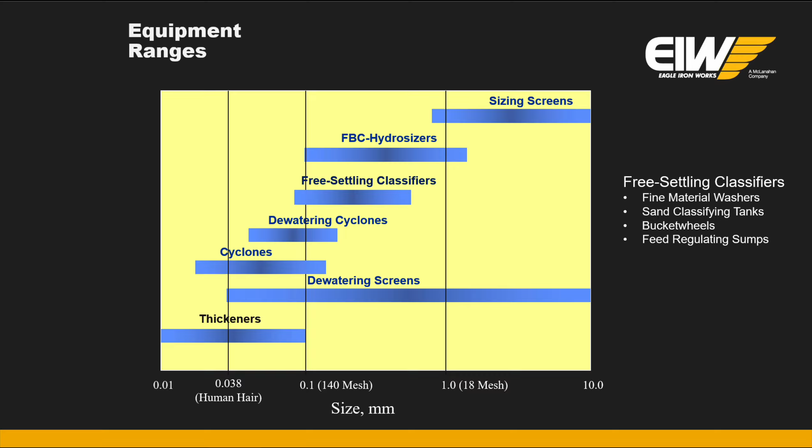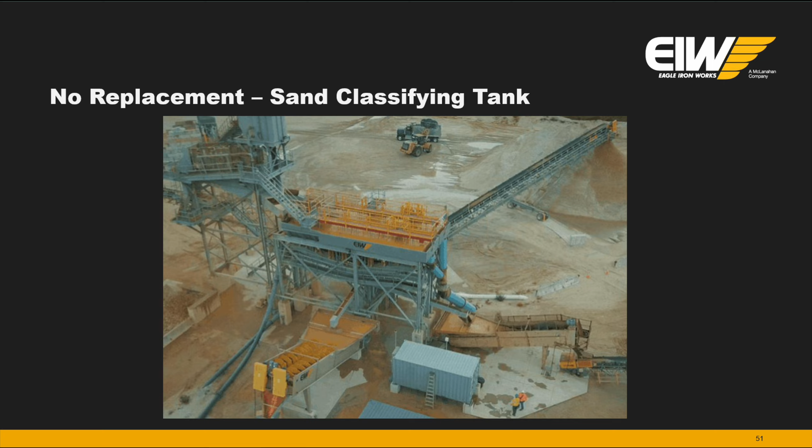So one classic piece of equipment that there still is not a replacement for, just because it handles what it needs to do so well, is a sand classifying tank. It originally started off as the water scalping tank, because it was real good at getting the solids out, much like a feed regulating sump, getting rid of the water and getting the solids. Then they started noticing that you can make a separation with this.

As you're putting it in there, you can make a separation from the middle of your gradation. So you can remove 30 to 100 mesh material out of the middle. So you can produce multiple specific sand recipes suited for different construction specifications, asphalt.

Within this unit, you have exit points: launder 1, launder 2, launder 3, and an overflow. Generally speaking, you have launder 1 and launder 3 making a product. Launder 2 is a waste, and the overflow is a waste. But if you found the market for it, all 4 of those could be a product. It separates one stream into 4, which is unique of any type of process equipment out there.

And also with these, Alan, the control systems, I don't think we have a slide on it, but we've come a long way. We've had controllers on these since the 1960s. Our newest ones are the digital Dial-A-Split and the Mark 10. Both of these are very good for putting multiple recipes in. So if you're pulling from one end of the pit and you change the next week and you're doing a different product, or you have multiple products you're trying to produce, it's all controlled now with the PLC and the digital Dial-A-Split.

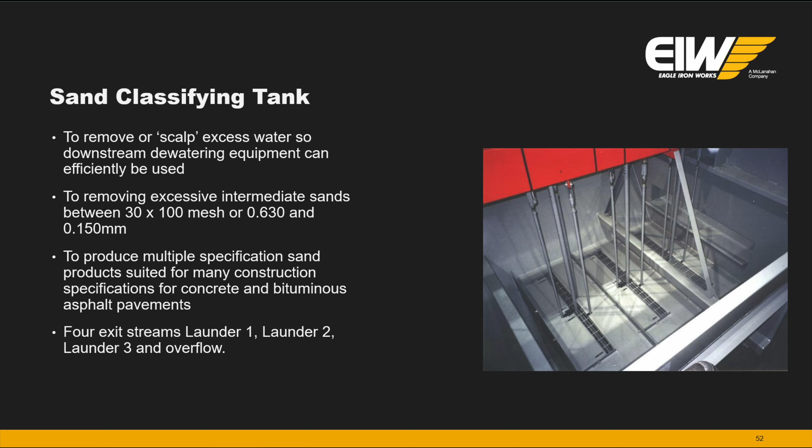I think I see one right here. Can you use a dewatering screen for a specification of a 0.5 millimeter to 1.5 millimeter sand? If you're trying to dewater that, yes, you can. If you're trying to make a cut point at 0.5 millimeters, it's not going to make a sharp cut point, because that's not what a dewatering screen is necessarily set up to do.

I see another question here. The air going up to the cyclone is created by a vacuum pump? No, it's created by nature itself, by the centrifugal force of the material swirling around, much like a tornado. It's just pulling the air up because it creates a lower pressure point in the middle.

So nature abhors a void. The void happens within the middle of the cyclone itself, and it pulls the air up into it. So it's not a vacuum pump or anything like that. There's no additional thing to it. It does it by itself just off of physics.